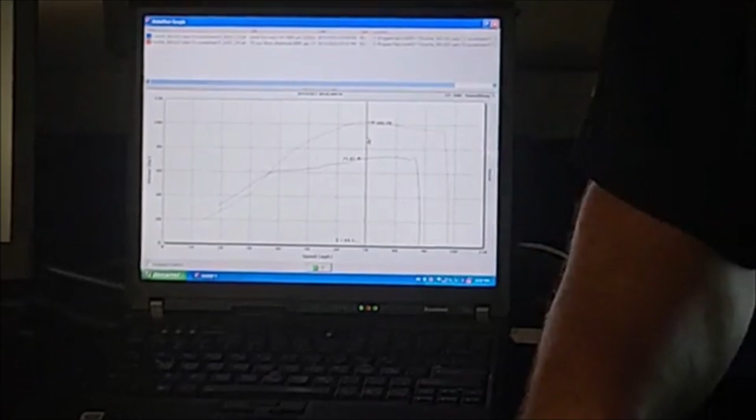So I don't know if you can see the screen here. This track dyno is modified. It's got heavier weights. The conversion factor is about 2.85. Okay, so this is a stock run, and this is the Echo Trail. However, it's not a regular Echo Trail. This is a 3-inch with a header, and it makes a lot of power. If you look at 101, that's about 288 horsepower.

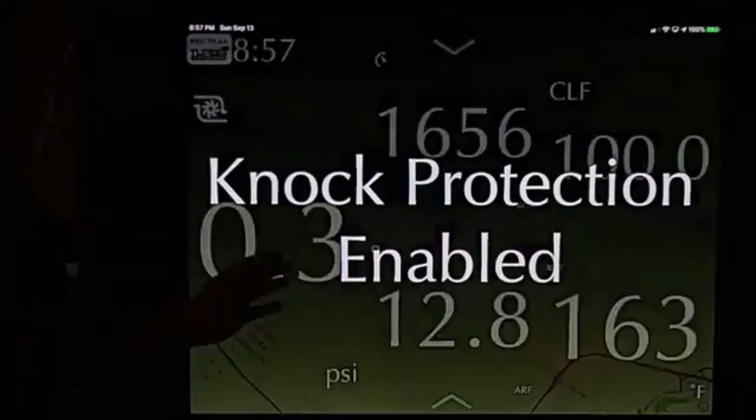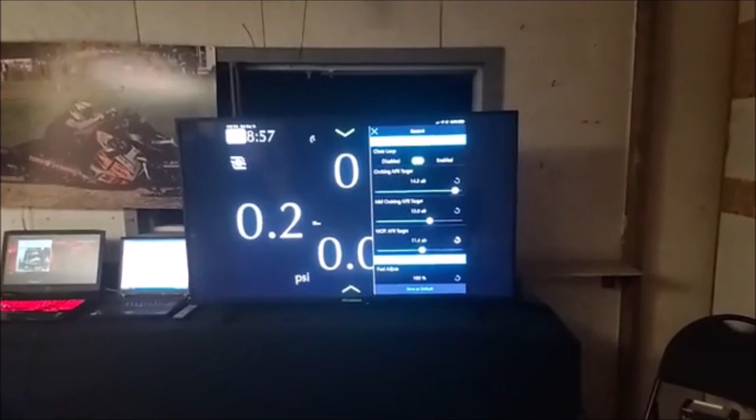Okay, so now what we're going to do is enrich it through the closed loop, show you how the computer can manage the air fuel ratio. So right now we're targeting about 11.8 to 12, and as you can see, the closed loop adjustment was being made to maintain roughly 11.8. Now with this machine, there's not enough fuel to really put it in the 10-to-1s, because at this power level with the header, we're near the injector limit, but we can make it pretty rich, okay? So that's what we're doing right now.

So what we did is now I put it back to the optimal air fuel. And this is what it's going to be set at for the tailpipe.

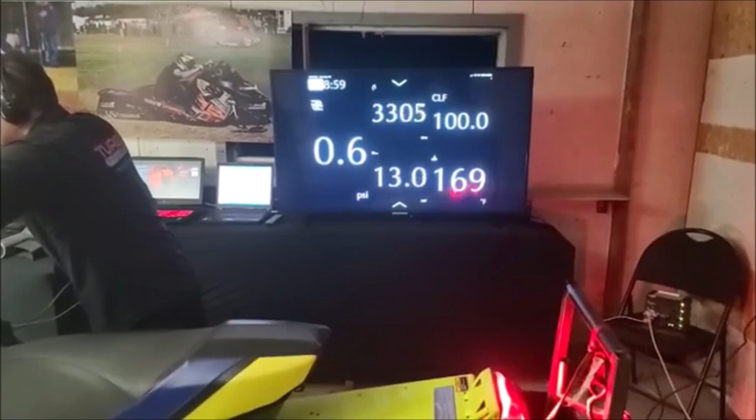Okay, so if you see the run here, the last run, we made 103.85 on this dyno with the 650-pound custom weights. That's multiplied by 2.85. So you're looking at, where's the little calculator?

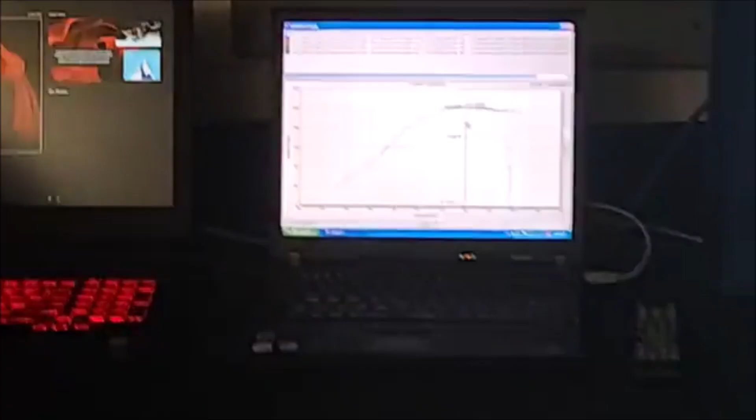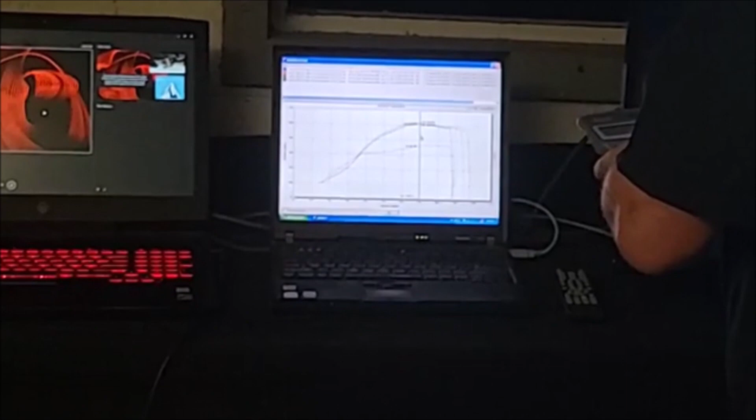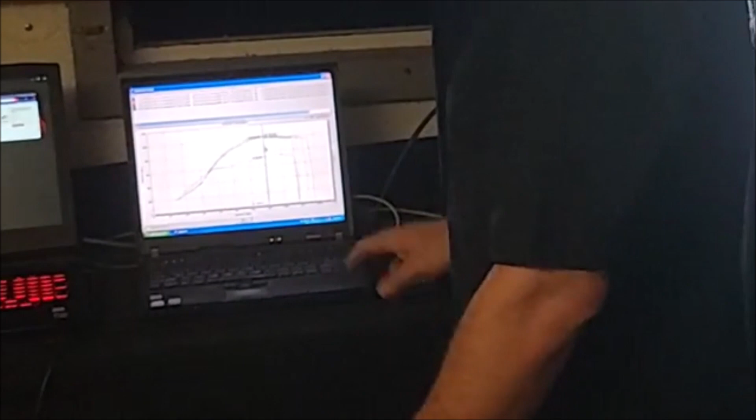Look at 295 horsepower. So the way it works is that this motor, when it gets warmed up like that, the pipe is hot, the header is hot, it makes a little bit extra horsepower. So the first run was about 288, and the last run was 295. But if we had gone in the 10-to-1s, I didn't record that one, but it certainly would have dropped horsepower by about 8 horsepower. Okay.

So let's do... still cold enough. We can do, let me see something. Make sure the intercooler is cool enough. Yeah, that's good. Okay. So we're going to go with Power Trail this time.

So when it comes to the header and the 3-inch, it seems like the tunes are pretty close to each other. So even Eco Trail makes a lot of power, Power Trail makes a little bit more, Max makes a little bit more. When you're in the more restrictive exhaust, the tunes have a larger difference, okay?

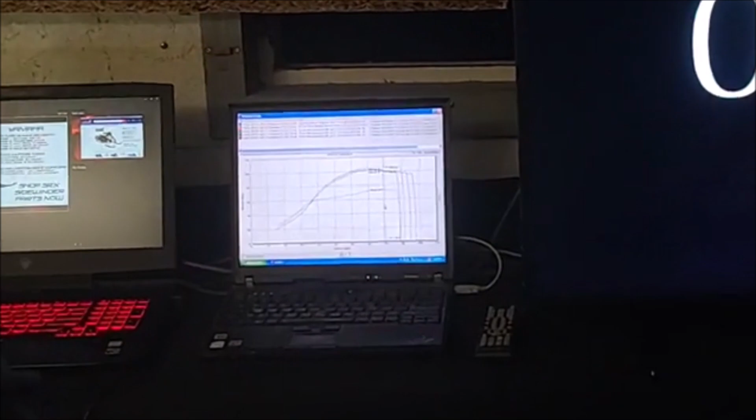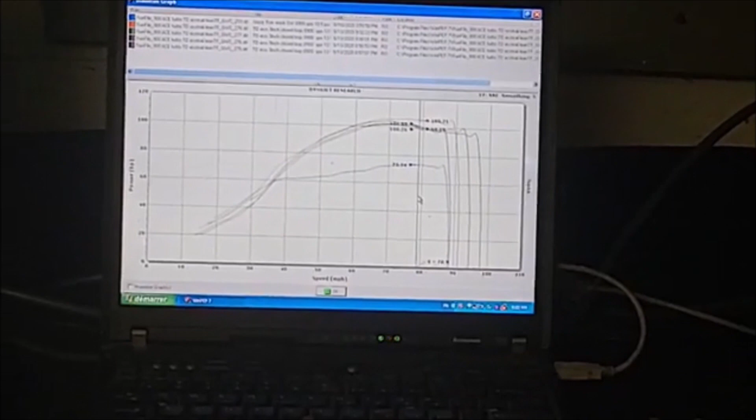Okay, so can you come closer? Yeah, okay. So we got 105 horsepower at the track on this dyno. And if you look at the graphs here, the Power Trail kind of maintains the horsepower. So there's quite a bit of difference. If you look at just the peak, it's not so much.

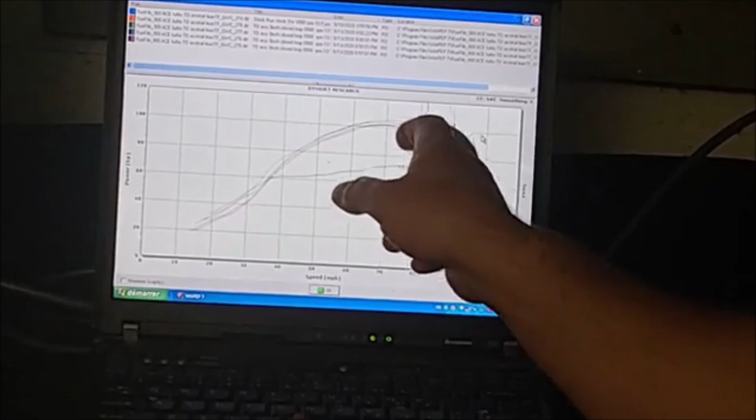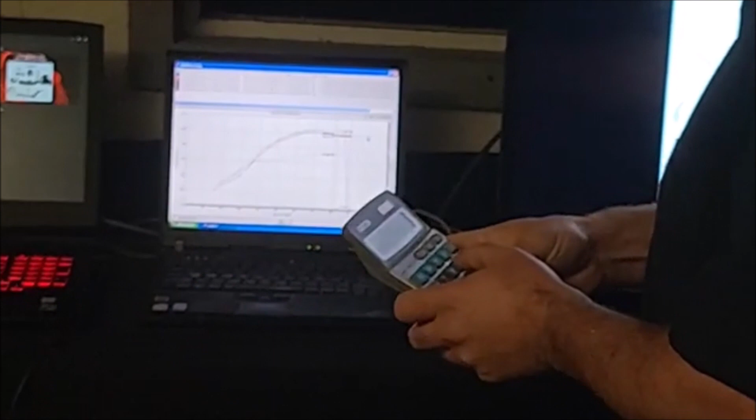But if you look down at about 80 miles per hour, once the clutch is shifted out and the load is completed, there's about 6 horsepower at the track, which is 6 times 2.85. So there's about a 17 horsepower difference once the clutch is shifted out. And the peak horsepower is 297 on Power Trail.

So now we're going to hit Max 17. We're going to see if the motor is cool enough. It's getting just about right. That should be all right. Max 17. Yeah, we'll do Max Cool. Actually, you know what? Yeah, we only have Max 17. That'll be fine. Okay. See, this Max 17 normally wouldn't have enough fuel, but due to the closed loop, we're okay. It's gonna add the extra fuel.

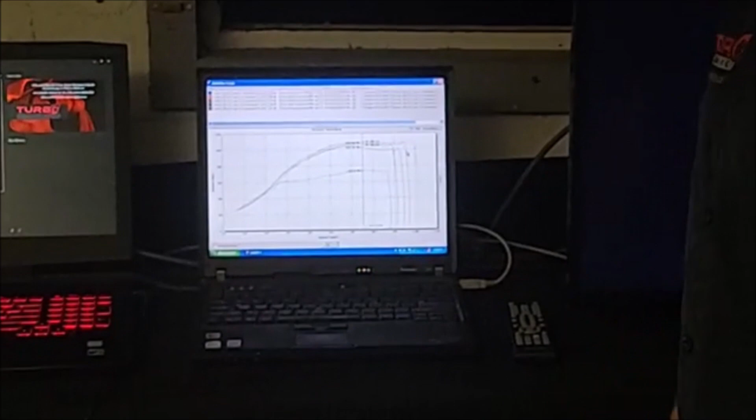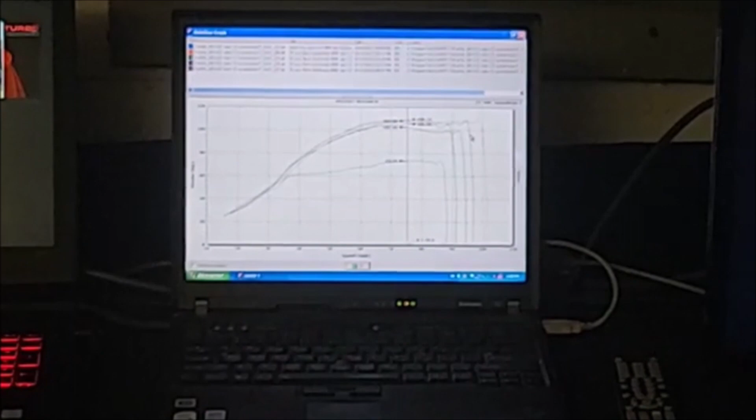Okay, so 109 at the track, and we look at the stocker. We start with 73 here. Okay, that's a stock machine. That's 311 horsepower at the crank.

So, as you can see, the air fuel keeps adjusting properly. We're going to make another video of this that's going to be more obvious with a stock exhaust. When we put this 3-inch and the header, we're maxing out the fuel system, so you cannot see it go like 10 to 1, but it definitely works really, really well. It keeps you at the proper level.

On this bad boy here, we'll have to put like a regulator. We'll crank the regulator up, and guess what? The closed loop is going to readjust our fueling. Even the cruising, the low throttle position, full throttle. So no matter how much fuel we throw at it, it's always going to correct. So of course you still want to have a good tune. You still want to have a tune that's fairly close, so the computer doesn't have to do all this adjustment.

So right now, we did it on purpose. Like I said, I'm repeating myself, we're doing it on purpose. We put a tune that is not optimal for a header. Normally we have a header tune that's richer, because we want to show you how much the computer can compensate, okay, to not only give you better performance, but also save your motor in case you increase the airflow.

Mid-range? Yeah. So Mike wants me to talk to you about the mid-range. We're always talking about full throttle, but even the mid-range. When you're cruising, you're going to be always in optimal range, meaning fuel economy. So it's pretty simple. It's going to be very good on fuel economy.